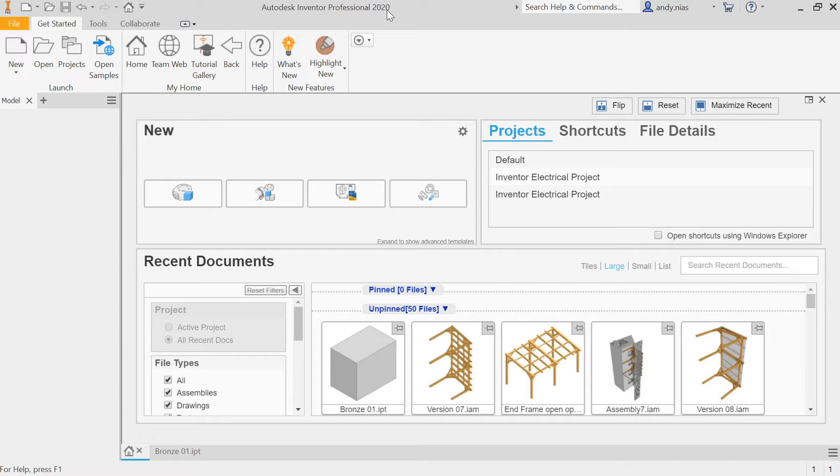First thing you need to do when you get your Inventor open, so it's Autodesk Inventor Professional 2020. If you type that into your start menu, the whole thing, or at least up as far as Autodesk Inventor 2020, you will get it coming up. It should have a big I icon. If you haven't got that, then you've got the wrong file.

So when you get this screen here, you're going to start off by hitting this new, so it's like a blank sheet of paper, new, and you are going to have to make sure that you select the right template from which to build the file.

So it should look something like this. What you need to make sure here, you may have that looking like this, it's got the ENUS folder. If you expand that little triangle arrow thing there and select the metric option, you have all these that are in millimeters, which is what we want.

And you're going to need to select here under part at the top, not assembly or drawing, part, standard mm, so that's a millimeter version, and click create. So you'll need to do that every time you start a new file, otherwise you'll end up in inches.

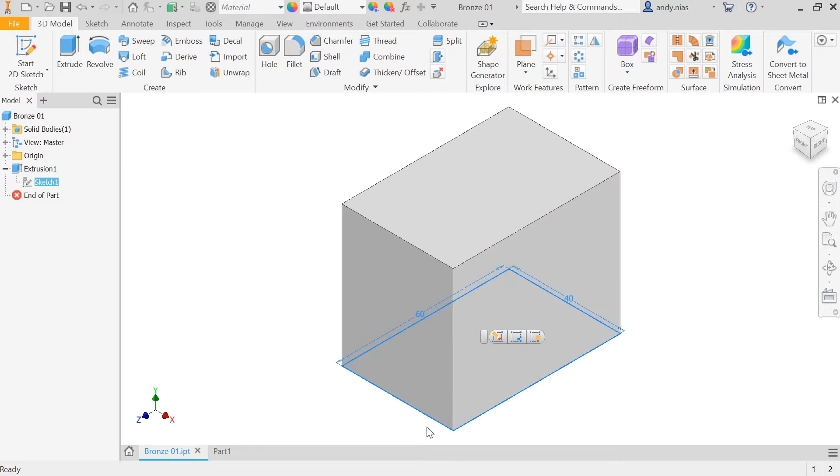So we've got blank space. First thing we want to do then, if I just look at this file here, we want to draw a shape that we're going to pull this from. If I show you what I did here, look, I started off by drawing a sketch. So everything starts off as a sketch, as a shape, a two-dimensional shape, and then we can pull it into 3D. So let's start by going to Start New Sketch.

So Start 2D Sketch. I'm going to click on the top part of the button, not the bottom part. That gives me other options which I don't want. So the top part of the button.

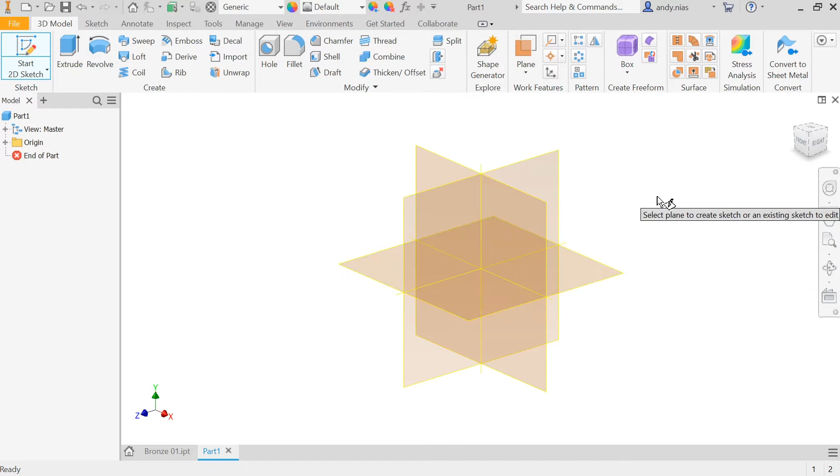Now it's saying where do I want to draw that sketch. If we look at the view cube, we've got a front, a right and a top. Let's draw it on what would kind of be the floor. So let's hit that plane there. It's going to spin round and we can now draw a shape.

We want to draw a rectangle, and the rectangle for the bronze is going to be 60 long and 40 wide for the bottom. So each of the little squares is 10 mil. So I'm going to get my rectangle tool.

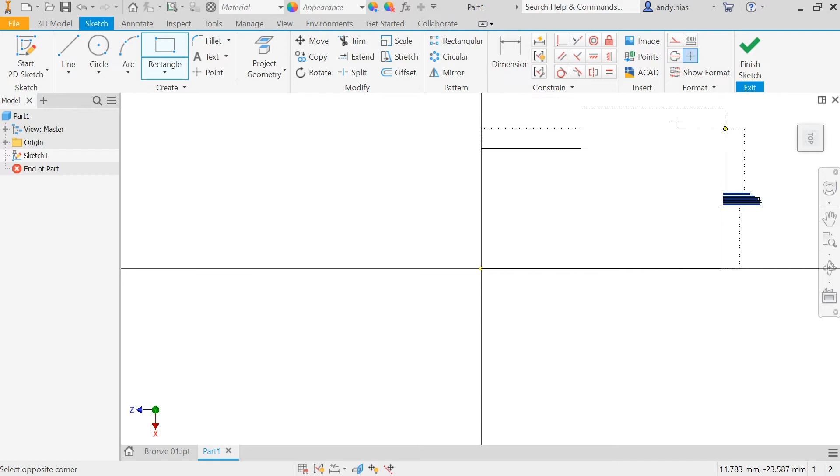I'm going to click once right in the center of the page here on the little dot. It's going to make life easier if I do that. Now I'm going to click once with my mouse and I'm going to move. I'm not holding the button, I've just clicked it once and I'm now moving the mouse away. And you can see I've got rectangle and I've got numbers.

Those are the sizes. So what I can do now is I can type in my sizes. Don't press the delete key, don't do anything other than just press the number. So I'm going to type 40. You can see it's replaced what was there with a 40.

Now I need to press the tab button to jump it across to the other dimension. Tab button is on the left hand side of the keyboard. It's got two arrows that face opposite directions. On my keyboard it's above the caps lock. If I touch that, you can see it's jumped across to the other one, and I'm going to make that 60. So just type 6 and 0.

So if I press tab and tab, I'm just going to zoom out a bit so you can see what's going on. There we go, there it is. There's my rectangle. If I press tab, I can jump between, so if I got the wrong size. Okay, once we've got that, press the enter key, and it's going to create that rectangle, and it's going to create it with those two dimensions in place.

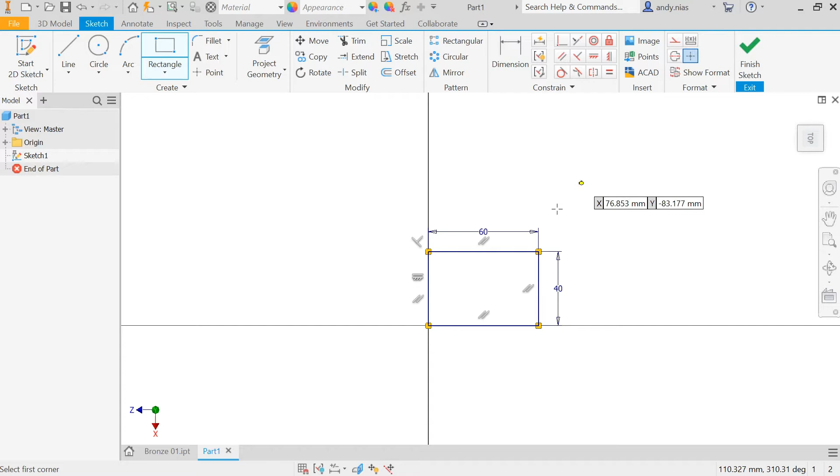If you've made a mistake and the dimensions aren't there, we've still got the rectangle tool highlighted, so if you press escape, or right click and press OK, that finishes that. So if I've got that wrong, I can click on the number and change it to something else.

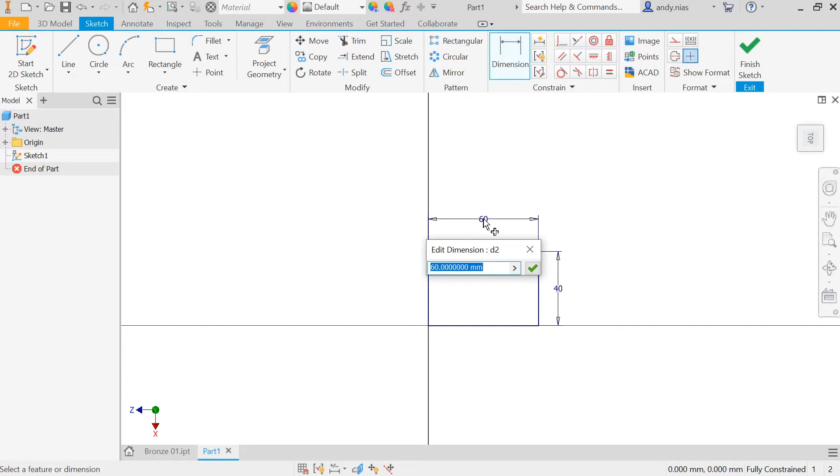And if it wasn't there, I can add it by going up to dimension, clicking on that line once, moving the mouse away, clicking again, and then making that 60. So ideally you create them when you create the rectangle, but if you haven't managed to, you can use that tool there. So that's our shape.

Once we've finished the sketch, we need to finish the sketch and exit. If you're thinking, how do I do the next bit - there's a big green tick. We've done that, and that takes us back into the 3D world. So I've got a profile. Now I need to extrude.

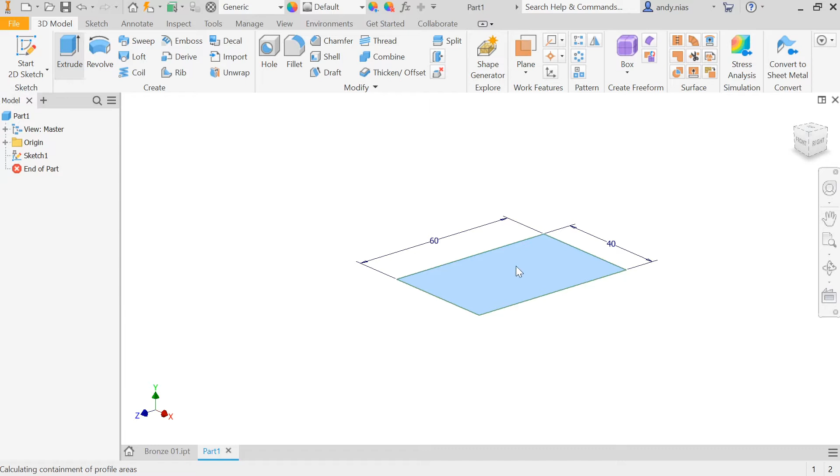That's this box here, it's going to pull it up. So we can select that. It's going to pick up that square already. We just need to tell it how far, and that's this number here. So we want to go up 50, just type in 50. It pops up, and I can press OK. And that is my bronze block 1.

What you need to do now is save it using that button there in your S3 Techie or S3 Graphics folder that you will have created. So save it there, call it bronze 1, and then you can have a look at bronze number 2.

Well, same as before, we need to create a new part with a blank sheet of paper, make sure it's metric, standard millimeter, and press create. So we're now in our part space. All our parts are going to start life as a sketch. So first thing, start 2D sketch.

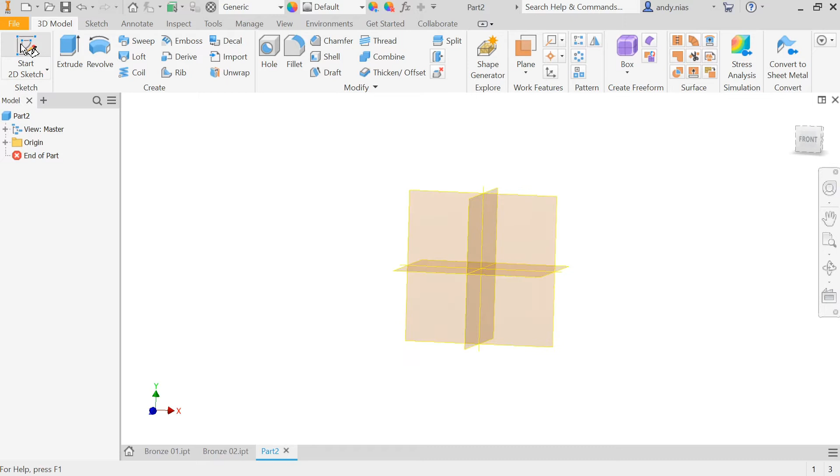Where do we draw the sketch? I'm going to draw it on the kind of floor sort of plane. So checking up here, that's the top, that's the front, so this would be the kind of ground. So I can click there. Now I'm in my sketch world.

I've got my sketch tools. So the bottom of this rectangle is going to be the same as before. So I'm going to click once in the very center point there, and I'm moving my mouse. I'm not dragging my mouse, I'm just clicked once and move the mouse.

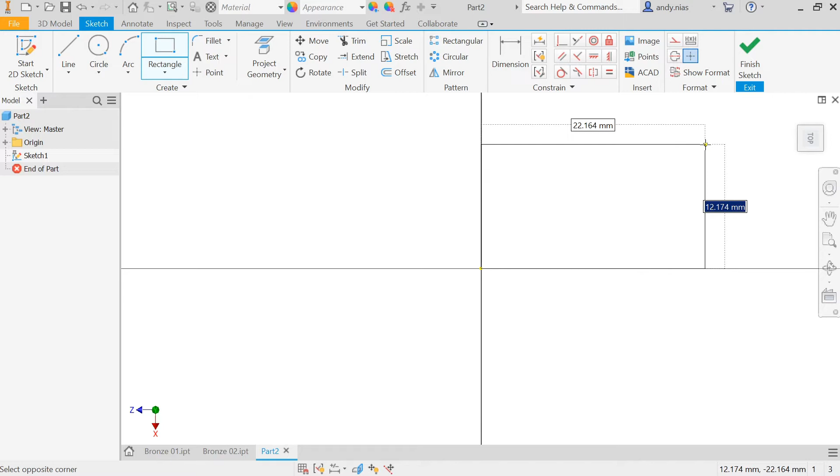Now I can put the sizes in. So again, it's going to be 40, type 40, tab key, that's going to be 60, and then I'm going to hit enter. If you want to zoom in and out, you can use the scroll wheel on the mouse, and if you want to move the drawing around the page, push the middle button down and you can pan things around.

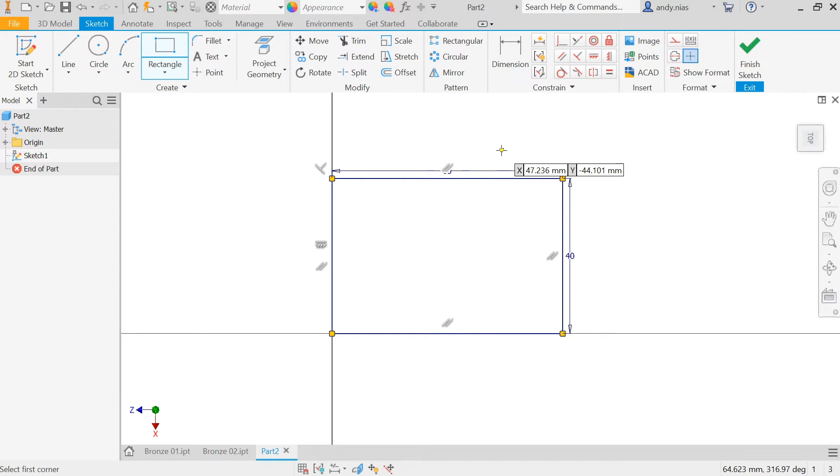So I've got my sizes. I'm just going to right click and press OK, or I could press escape. So I've got rid of my rectangle tool. There we go, I've got my 2 sizes.

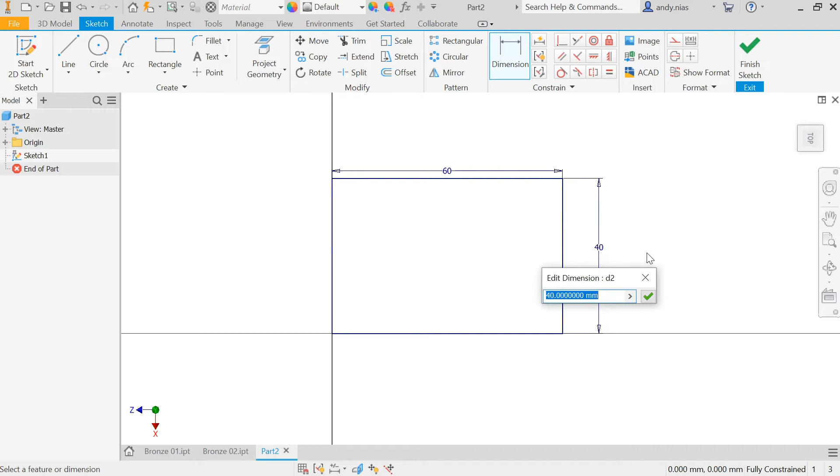If they're wrong, I can click on them and change them, and if I've missed one off, I haven't got it, then I can go to the dimension tool and add it onto that line, like so. So there's my profile for the base shape. Finish sketch.

I'm going to extrude that shape now, and I'm going to come up 50, and there is my main shape.

So what I need to do now is remove this section here. So how am I going to do that? I'm going to do that in exactly the same way as I created this shape here. I'm going to draw a sketch, and I'm going to extrude it, but instead of extruding a new shape or adding a shape, I'm going to subtract the shape from it.

So start off with a sketch again. Where am I going to draw the sketch? It's asking where to draw it, so I could draw it on any of these surfaces. I'm going to draw it on this one here, but I could create the same shape by drawing a sketch on either of these two instead. But let's go for the side.

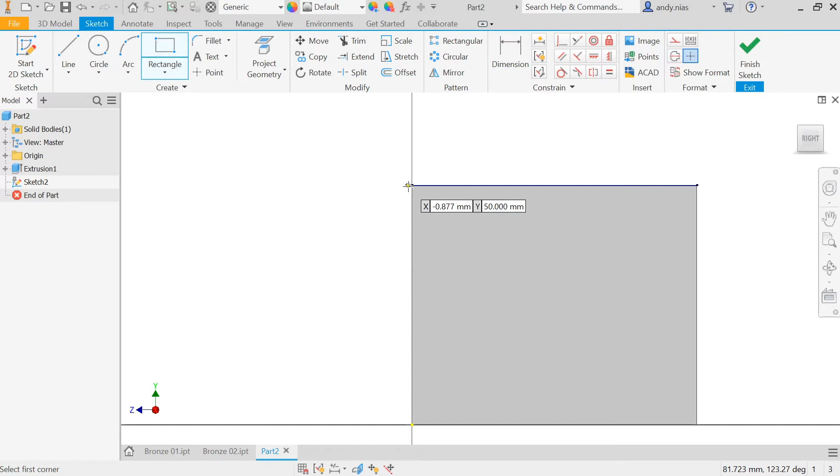I'm back in my sketch world again. I've got a rectangle tool. This is going to start right from that corner, because I want to take out a shape here. So if you get your tool and hover over that top corner, you see it's actually snapped to it. I want to make sure it has done that.

Then I'm going to come out and put my sizes in. So again, I've just clicked once and moved the mouse, and I'm going to type 30, then the tab key, then type 20. Okay, that's all I need. So now I can finish the sketch.

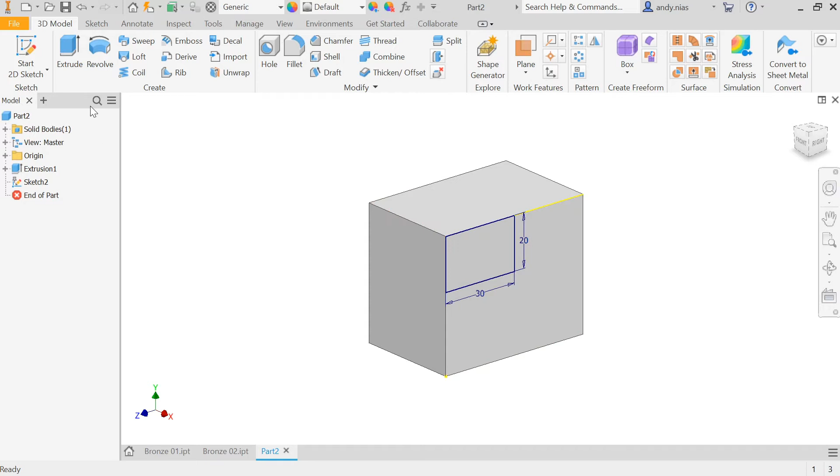What I want to do here is subtract this bit all the way across. So again, it's just an extrude. It's actually picked up that profile. Now what we've got here is extrude add, so it's adding it on, sticking out. It calls it join, we call it add.

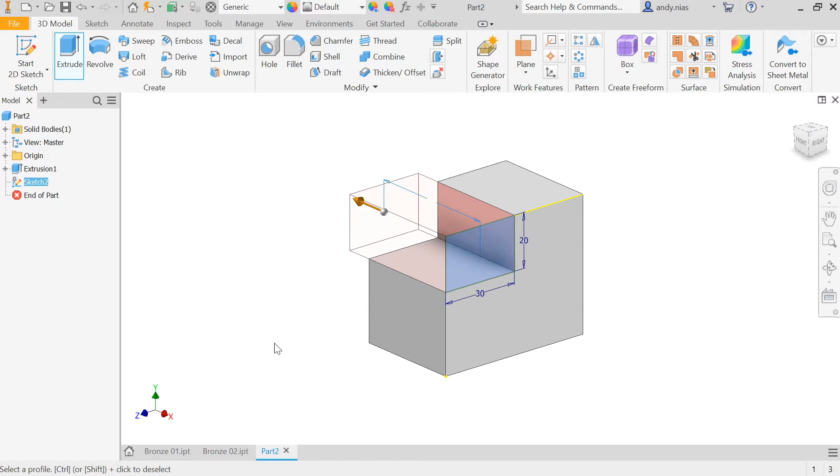What we want to do is subtract. They call it cut - subtract, take it away. So if I hit that one, you'll see it automatically changes the direction. If for some reason it doesn't, you can change the direction using these buttons here, and 50 is fine - we can leave it at 50 because it goes all the way through. So there is our second block.

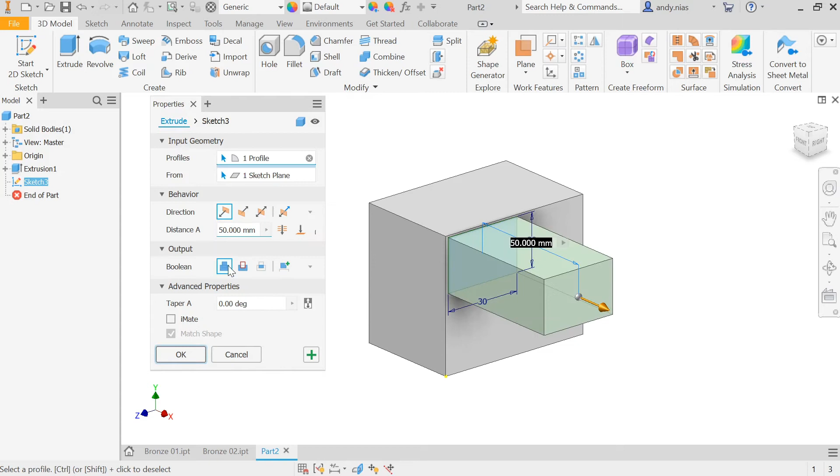One thing to double check - what might happen - I'm just going to delete that for a minute and do it again, because I can imagine some of you may end up doing this. We'll create a sketch, go onto that surface, get a rectangle, and miss that corner just fractionally, so you might not notice. We'll do the 30 and the 20, then extrude and subtract. Now what you can see is, because that rectangle wasn't right on the corner, it's not taken the whole thing out.

So what do we do? Well, we can go back and edit it. So I can find here the extrusion it's talking about, and in fact the sketch that we're talking about - sketch 3 - by expanding these little plus signs. So it's not that one, it's this one here.

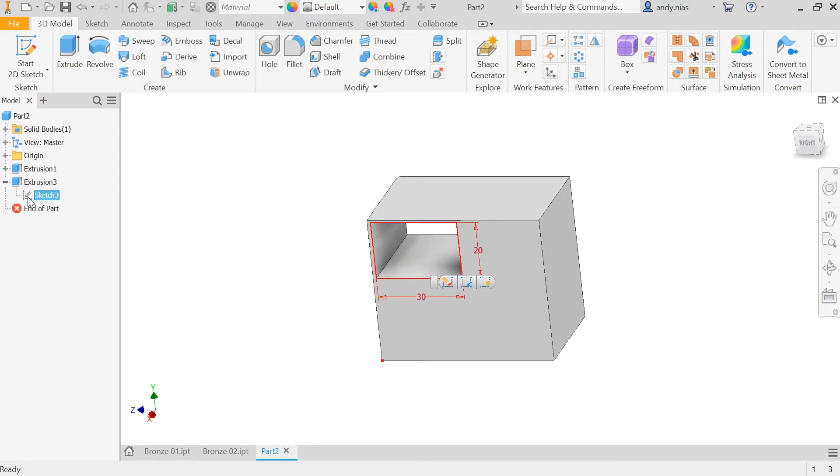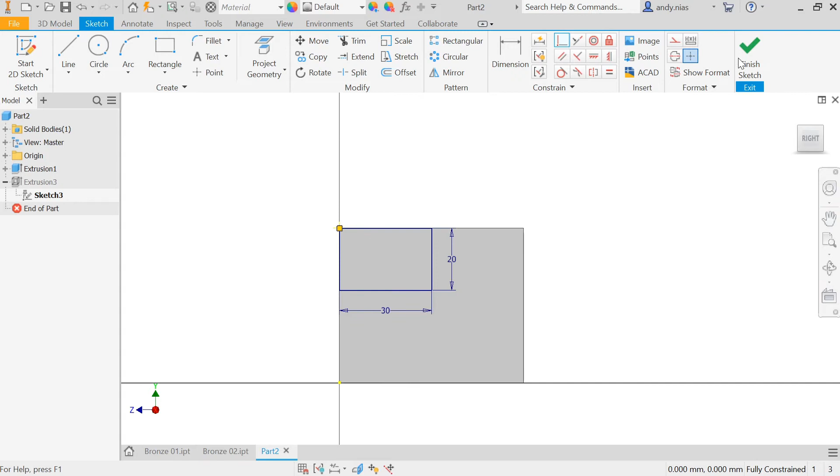If I right click, I can edit the sketch, and what I need to do is get that corner to touch this corner up here. The easiest way is to use this constraint here - it's going to take one point and stick it on top of another point. If I hit that one and come up here to this corner, you can see a very faint yellow circle appearing. If I do that, it's going to jump to it. Finish sketch, and this will update - because the sketch is now in the right place, it's taken that block away.

So hopefully that video helps you complete your second block, and hopefully you're getting the idea of going into a sketch, drawing a shape, finishing the sketch, and using the extrude tool. Right, let's see where that takes us next.

Okay, so we're now on to block number 3, which is a little bit different in that this time we've got an added shape coming out, an extrude add coming out the side, and the overall shape is a little bit different. So how are we going to model this?

I'm going to model this by first creating this block that's behind, the bigger one, and then I'm going to model this one sticking out the side.

So let's start again. New, metric, standard millimeter part, create, and this time let's draw a sketch. I'm going to draw that big block. I can draw it on the floor again, or this time I'm actually going to do it on this plane here, so on the front plane.

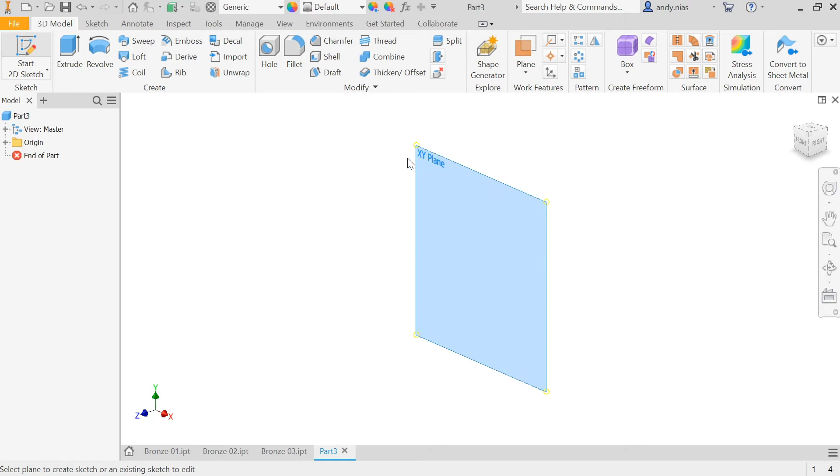If I'm doing it on the front plane, I'm going to draw a square. So clicking on the center, click once and move, type in 60 tab 50. Is that the right way around? Looks like. Okay, zoom out a minute. So I'm happy with that. Press enter. If I've done it wrong, I can change the dimensions using that tool up here. That's all I need for now.

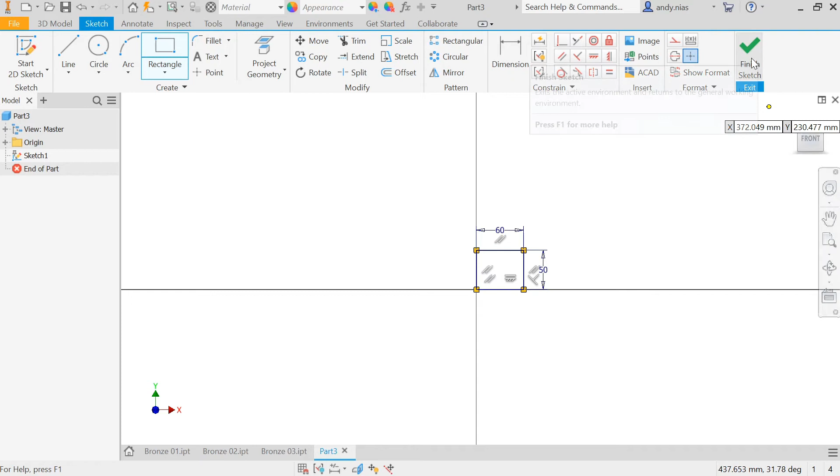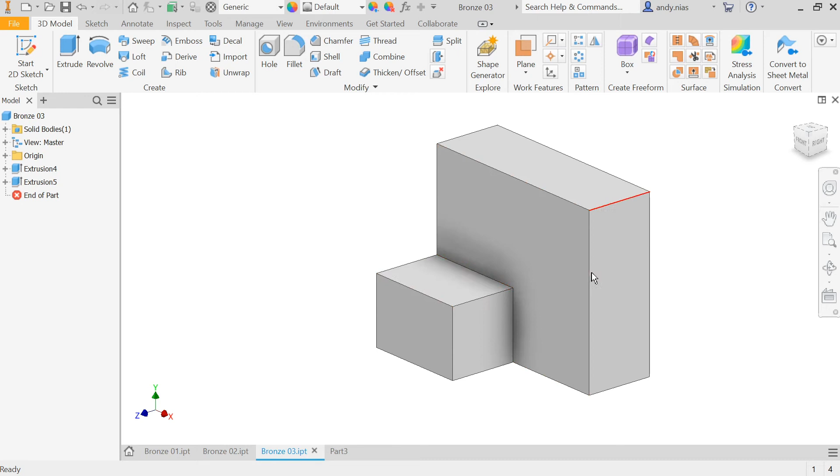I'm going to finish the sketch and extrude. Some of you might have been tempted, since it's going to be extruded 20 this time, to draw the other shape in that same sketch. If I do that, when I extrude this I'll end up with either a solid shape where there shouldn't be, or some other problem. Try and separate things out into the different parts they're made up of.

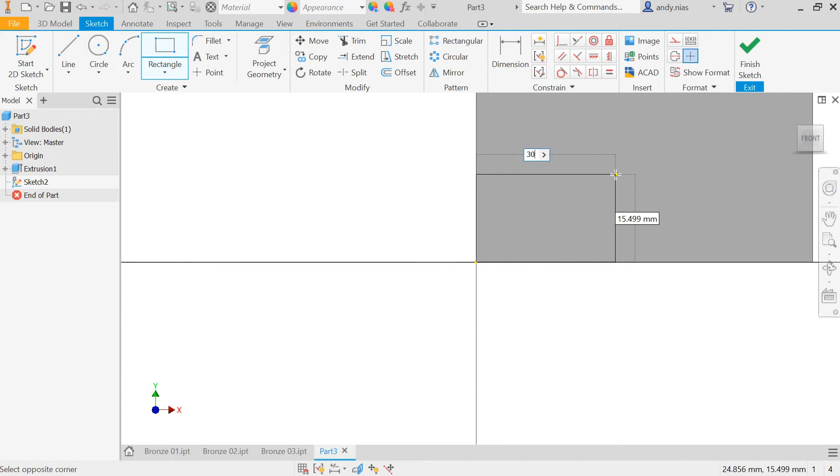So the first part being this here. The next one, another 2D sketch on the front. We're going to use the same corner rectangle, and this time we're going to catch that bottom corner, make sure it snaps to the green bit, and then pop it on here, and it's going to be 30 tab 20 enter. That's my sketch.

So this bit is going to be coming out, finish sketch, and let's extrude that by 20, which is already popped up because it's the last size we used. Okay, so there's block number 3.

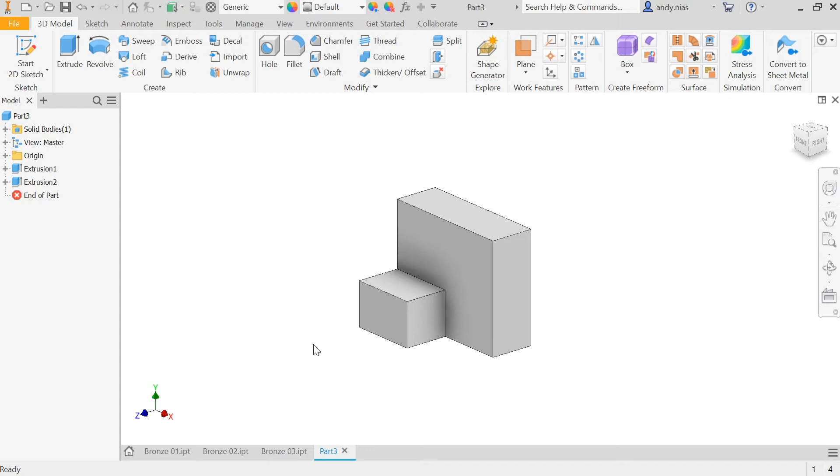Next thing, block 4 is basically the same, except here, rather than catching our corner, what we need to do - in fact if I just delete that one - for block number 4, we need to have a sketch that is here. Our sketch for this shape is not in the corner.

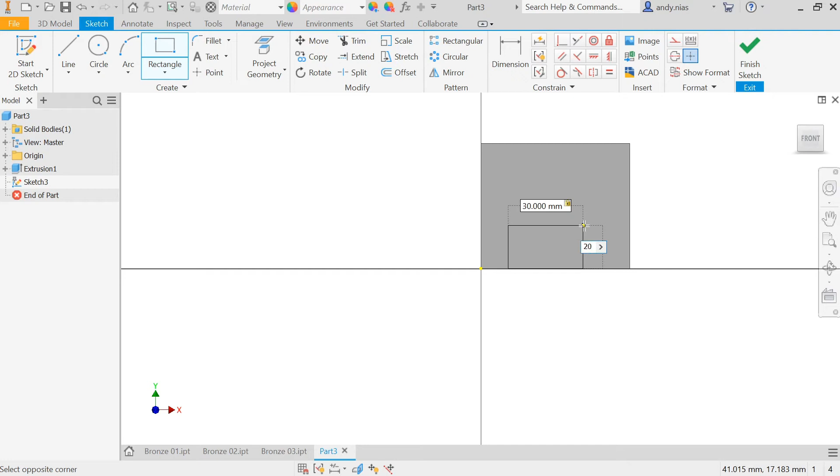It's a different spot. It's the same size - no, it's not, it's 40, tab 40, and by 20. But this gap here should be 10, shouldn't it? Should be 10 mil, because this is 60 and that's 40.

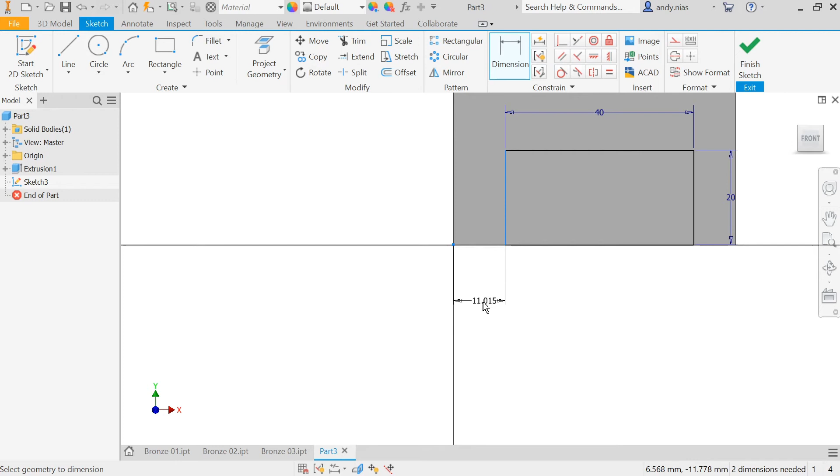So how do I make that 10 mil from the edge? What I'm going to do is select this line here, the side of my rectangle, and come down and select the little yellow center square. If I haven't got that there, I can select the edge of the block that's behind, so it's gone red. Either of those, I can select them, and then come down here and position my dimension. Once I click it, it pops up, and I can change the number to 10. So that's the finished shape for block number 4.

If I just add that extrusion on here, there's block number 4.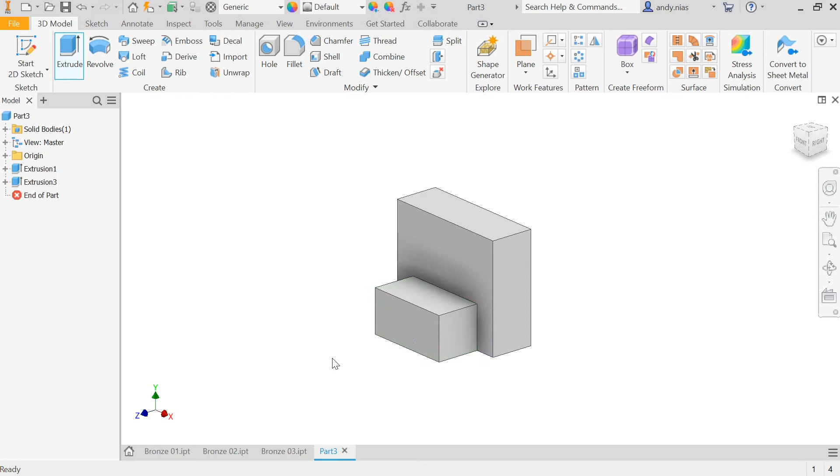Okay, ready for something a little bit different. On block 5, we have a block that's got a hole right through the centre of it. So I'm going to show you a slightly different way of building a sketch. It makes this really simple to model. As before, new part, make sure it's a standard metric version, create. Once we're in that, we're going to draw a sketch, and go for the front side again, and I'm going to draw that front elevation.

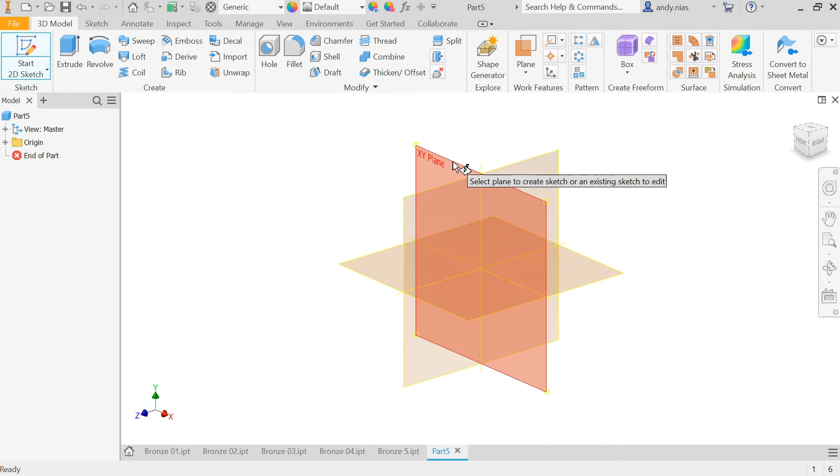Now what we want is a rectangle. Previously we have used a 2-point rectangle. What I'd like you to try this time is, if you hit this little drop-down button, 2-point center rectangle. What that means is if I click on the center here, rather than that being a corner, that becomes the center of my rectangle. So I can drag it out, look, and you can see I'm creating a square. If I need that to be 60 by 60, type 60, tab 60, enter, and I've got a square that is centered about this point here.

Why is that significant? Well, the next thing I need is another square that is also centered about the rectangle, that is 40 by 40.

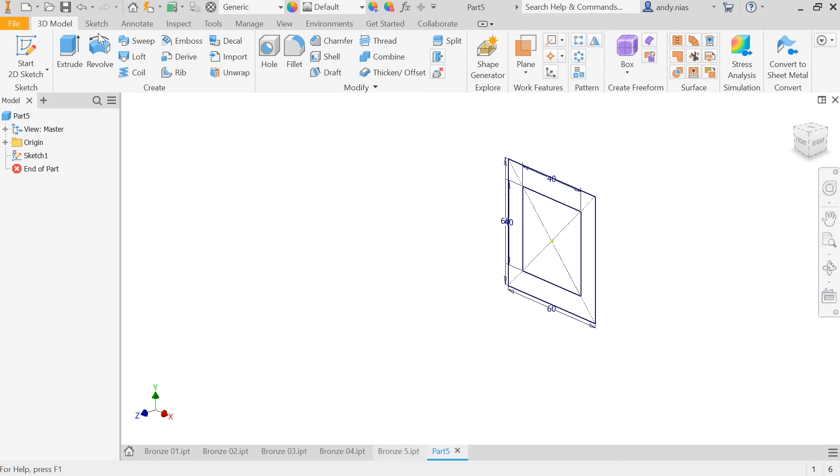If I finish that sketch, you can see that ring is what I need to create the 3D shape here. Rather than creating it on two different sketches, this time, because it goes right through, I can just select that part, not the middle, but that part of my profile, and extrude that 30mm. So very quickly, by using that center point rectangle, I've modelled that part in one step.

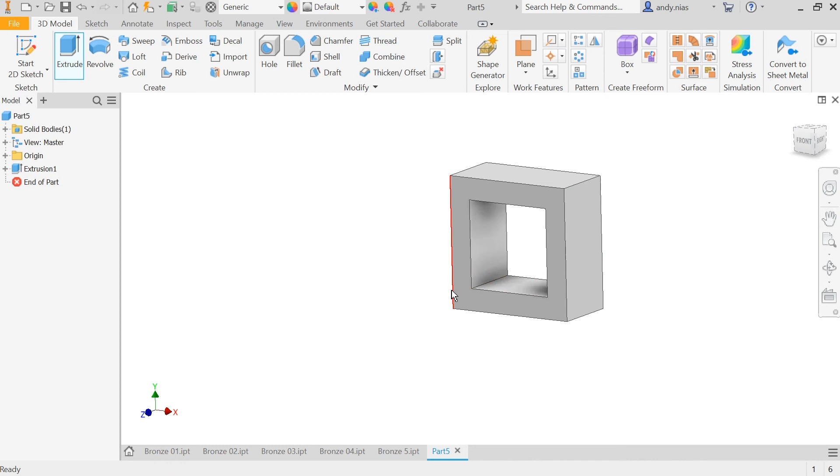So that's block 5. I'm going to leave you to do block 6, which is kind of similar, but you'll maybe have to think about where you're going to put the squares.

Okay, block 6, a bit of a variation on block 5, in that we've got 2 cutouts this time. So how are we going to make that? Let's start off with the overall shape. It's a symmetrical part, so let's do it with one of the center point rectangles again, and then we'll look at how we're going to add these 2 squares in.

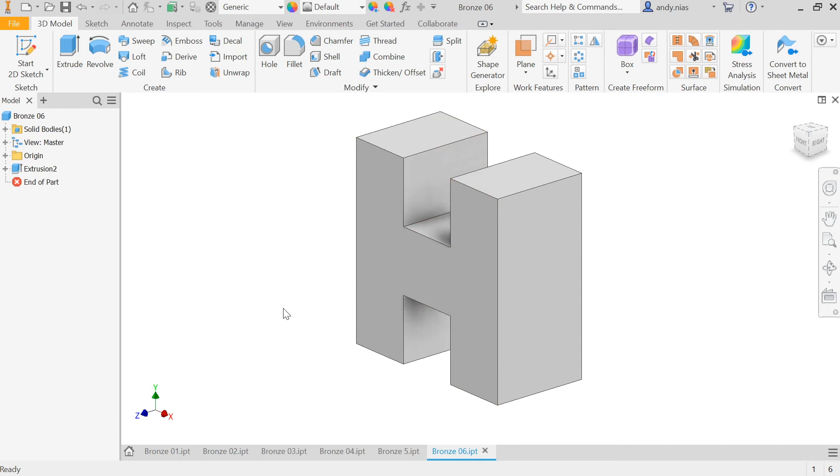So new part, standard millimeter. We're going to create a sketch on the front plane, which is that one. We're going to use a center point rectangle to draw a rectangle that is 60 by 60.

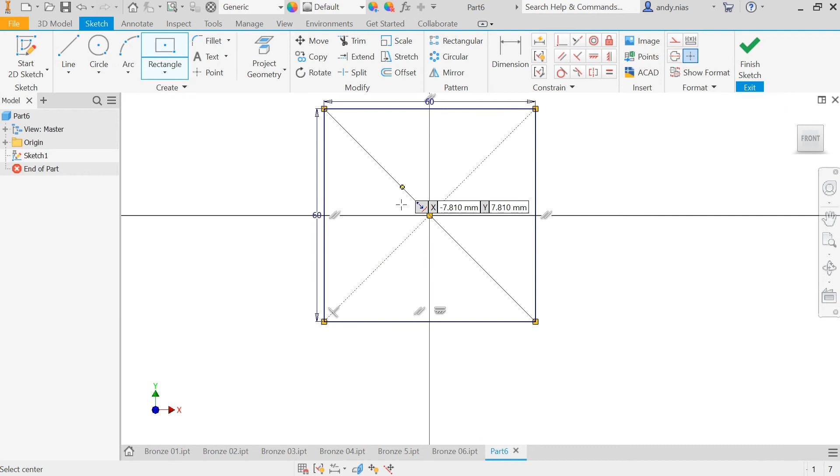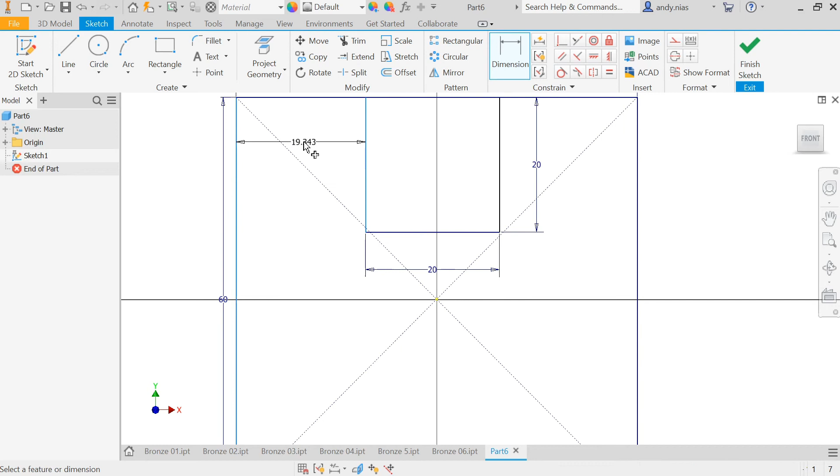Now what I need is these bits cut out here. There's several ways I can do it. Let me show you both and you can choose. If we do the corner point rectangle, we would need to click somewhere up there on that top edge, and go 20 by 20. Now you'll notice it's not in the middle. So although it's locked that top edge, it's not centered. So I need to add a dimension using the dimension tool between that line and that line, and it's going to be 20. Once I've done that, it all goes blue and it's locked. So there's one way of doing it.

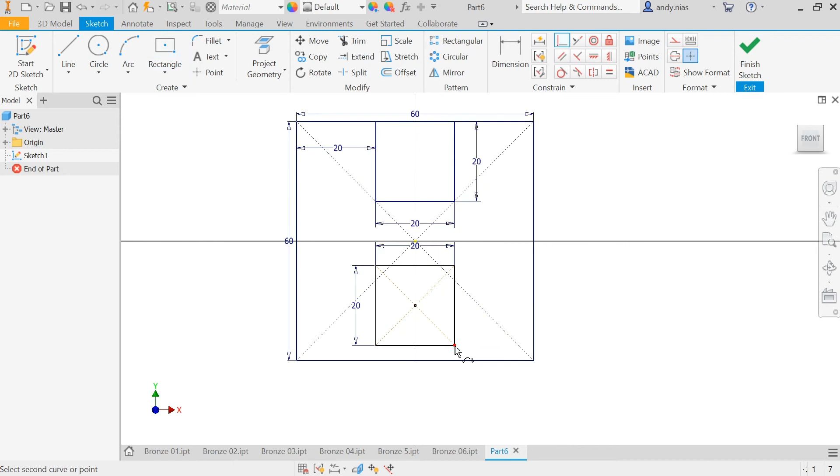The other way I could do it using the center point rectangle is if I used this central origin. If I come down from it, it kind of snaps to it. I can then go and create my 20 by 20. This time what I need to do is use this constraint tool to lock that to there, and then that is now in the right place. Either of those ways would be fine.

Extrude, just select the H shape, make it 30, and there is the block.

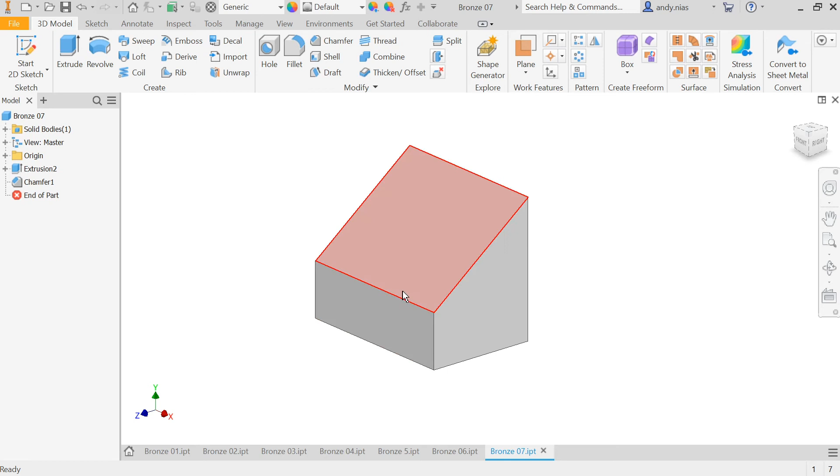Okay, so now let's look at bronze 7 blocks. We're starting with the same basic 60 by 40 by 50 block, but we've cut a corner off it. Several ways to do that. Let's look and see how it can be done.

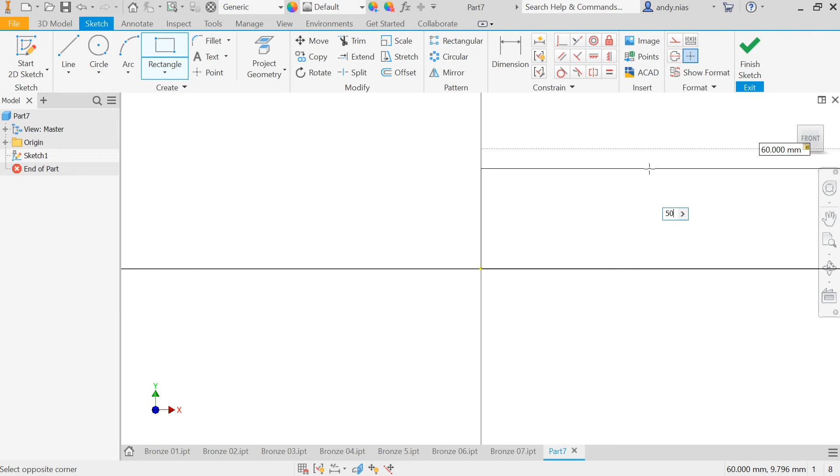So new part, standard millimeter, create. Let's quickly make our basic block shape. These are steps you should now become really familiar with in terms of starting these sketches and creating simple extruded blocks. So we've got our 60 by 50, let's extrude it by 40, and we're done. There's our block.

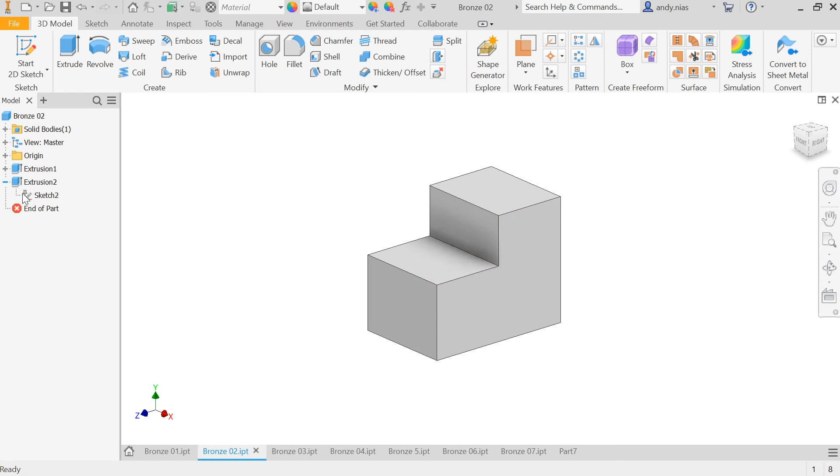So I need to cut this top corner off here. Now possibly the most obvious way to do that would be to do it with a sketch. In the same way that on our previous blocks we maybe subtracted that shape using a rectangular sketch, if you think about this here, what is making that stop being a rectangle is this triangle, which goes from that corner to a certain distance down here.

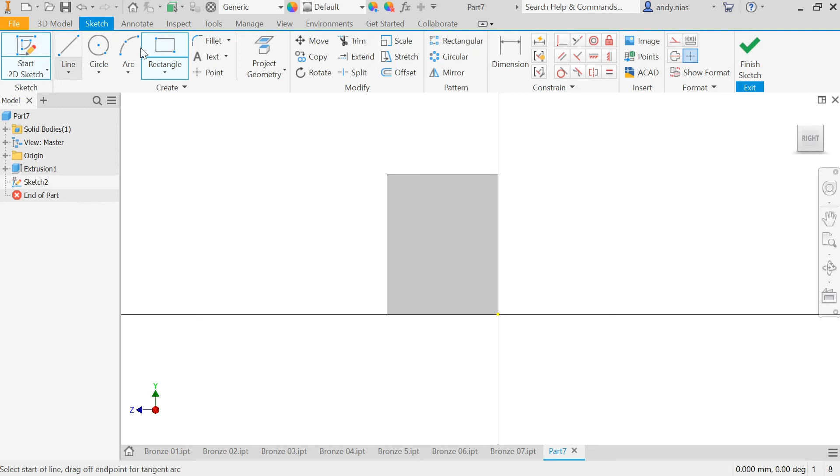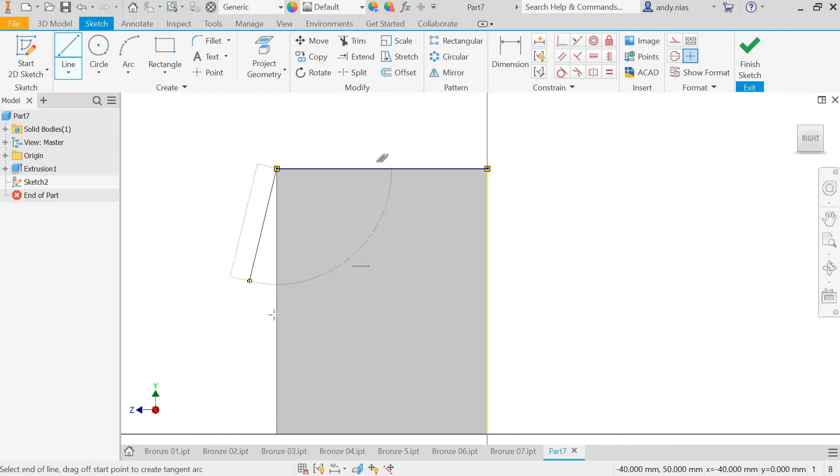So what we can do is draw a triangle on this end face here. Let's do a sketch on that end face, and we want to draw a triangle. There's no triangle tool here — there is an option to do polygons and stuff, but we're just going to use the line tool, and we need to make sure we snap to that top corner. Otherwise, if we're a bit down here, we're going to leave a bit when we try to extrude subtract. So snap there. I'm going to come along this way first to that corner, then come down the way. The reason I'm doing that is because if I come down here, I can actually add in my dimension.

So that has dropped it down 30 mil, and now I can go back and snap to that point again, and that is going to create our shape. Just when I did that, if I go back a minute, I put this line on.

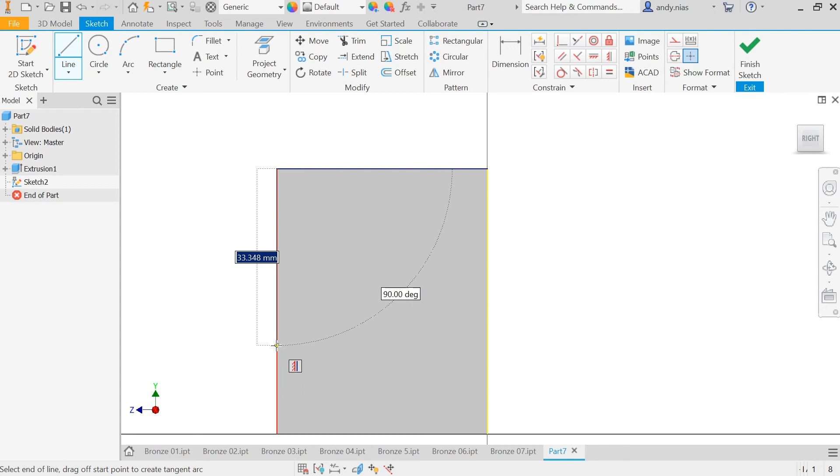Make sure if you're going to do what I just did that you are in the right direction. See, it's saying 90 degrees and it's got the little constraint thing there, the little red and black icon. So if I type 30 when it's over here, it's not going to end up in the right spot. So 30 to there, press enter, and we've got it.

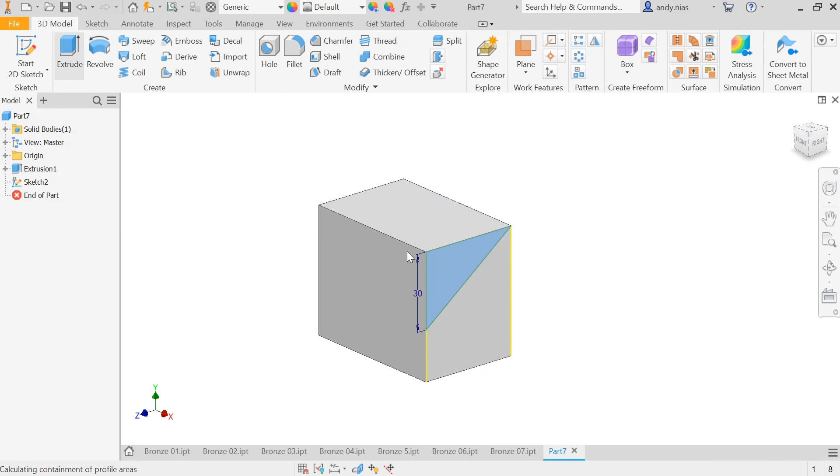And then we can put our next line back on as I had. Finish sketch, and we can extrude, and it's picked up that one, and again we're going to subtract. Now this time the default size isn't what we want, it's less than all the way through, so you can hit that button there, it goes through everything, and there we've got an extruded part with a slopey edge.

So if you were going to do that on two sides, you could do the same by drawing two triangles.

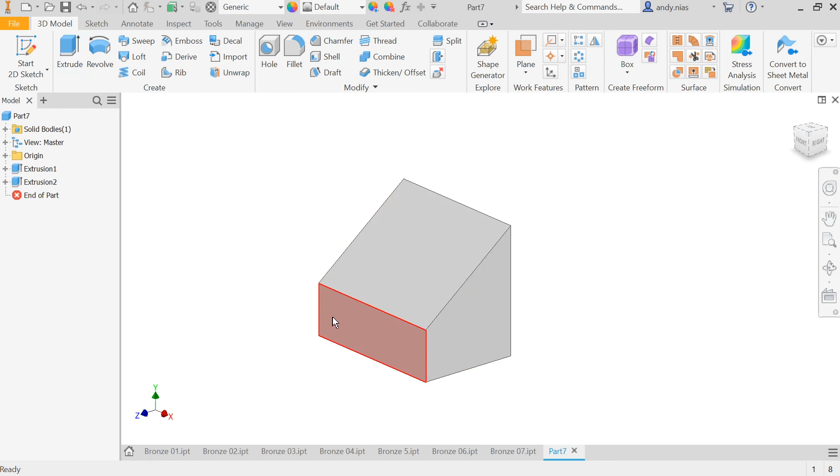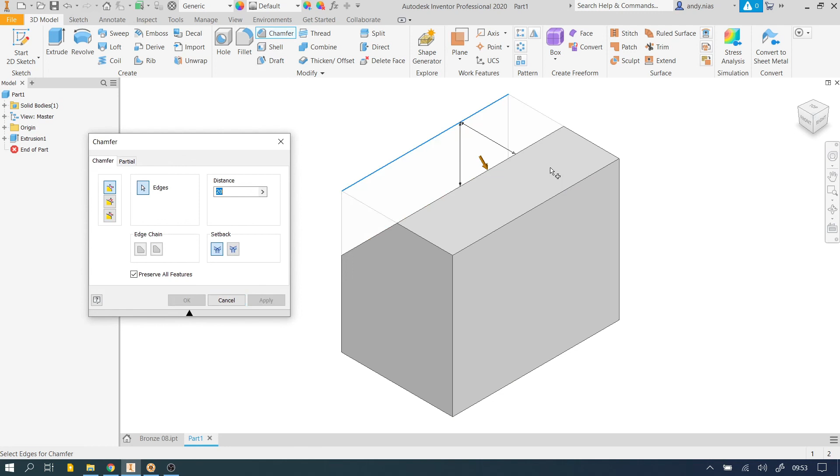So bronze block 8, which is our standard shaped block with the corners removed to make it look like a kind of a house. How's the easiest way of doing that? Let's start with our standard block, 40 by 50 high by 60 long, and we need to remove these two corners here. We could do that by drawing a sketch, a triangle in the top corner, and extrude subtract to remove those edges. But an easier way is to use the chamfer tool to select those two corners. Make sure you've set that to 20 mil, that's the size we need in this instance, and press OK.

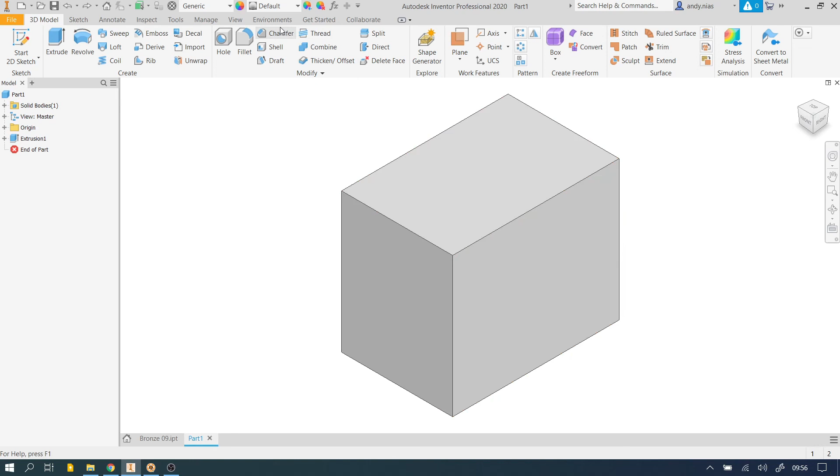Bronze block 9, again we need to remove two corners. Starting with our standard block, 40 by 50 by 60, we could draw a triangle on this surface here in each of the top corners and extrude subtract, but as we've learnt, the quicker way to remove a corner is using the chamfer tool by selecting the edges and setting the size.

If we accidentally select the wrong edge, we can deselect it by holding the control button down and hovering over the edge. You can see the line has turned red. If I click this once now, it deselects that edge, and I'm left just with the two that I need.

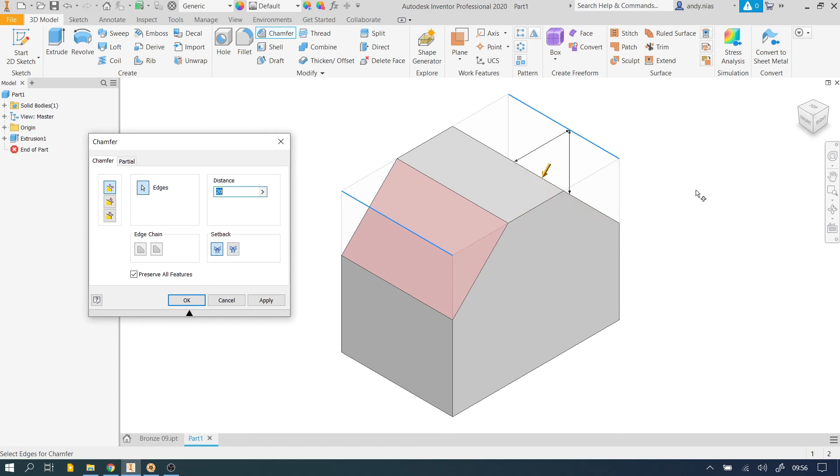Okay, so bronze 10, similar to the previous few you've done. This time the cut doesn't go all the way through though, so let's have a very quick look. So I've got my basic shape here. I want to draw a triangle on this surface here, so sketch on that surface.

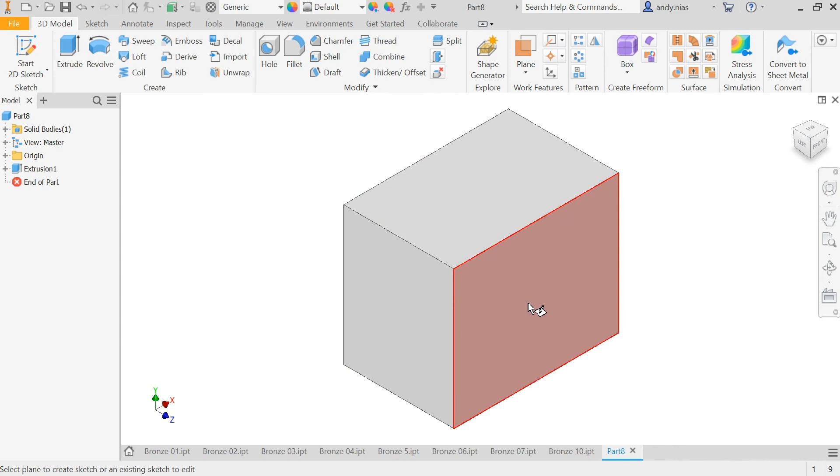I'm going to get my line tool and hover over that top corner. I'm going to come in, this time it's 40 along here, so I'm making sure I'm snapped in the right direction, 40 and enter. I'm going to come down here and make sure I pick up that line that's gone red. Don't quite know exactly where it's going to be yet, but there we go. And then I'm going to add one more line between these two.

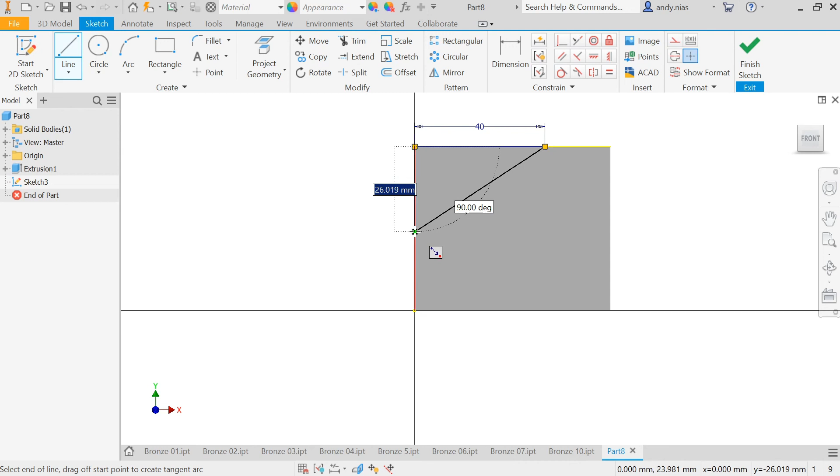Now that line there, I need a dimension on this one. If I try and put a dimension on there, it's picking up the whole line as well, so maybe it's easier to go between this top line and this point. If I hover over that corner, you get that little square, and then move in this direction, that gives me just the length of that line.

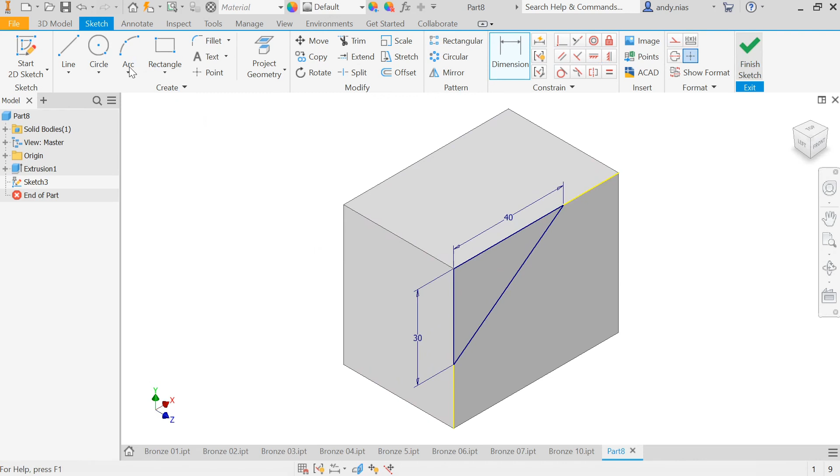So I can finish that, I can do extrude, and again I want to subtract. I don't want to go right through, I only want to go 20, so I can hit that, and there's my shape.